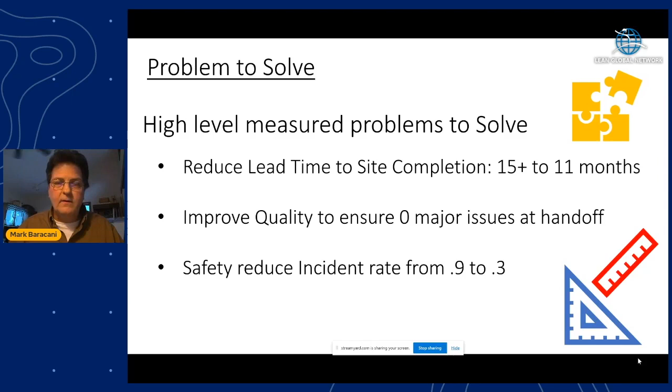And Microsoft is extremely into providing a safe construction site, more than any other company I've ever worked for in my 30-some year career. So the safety goal was to reduce the current incident rate that was at about 0.9 to 0.3 and be able to sustain it around 0.3 or 0.2. Now, if some of you are in the construction field, I think the global averages are more between 2 and 3 on a recordable incident rate. So Microsoft really wants to be much better than that. We want to be 10% of that. So they have extremely high safety goals at Microsoft, which is a great thing to keep the construction workers and their employees safe.

So it's definitely more of a challenge to get to the value creating work than it was at Genie, where you're working directly for that company. So that was one of my biggest concerns when we started this venture, and it has some challenges, but it has not been as much as I thought it would be.

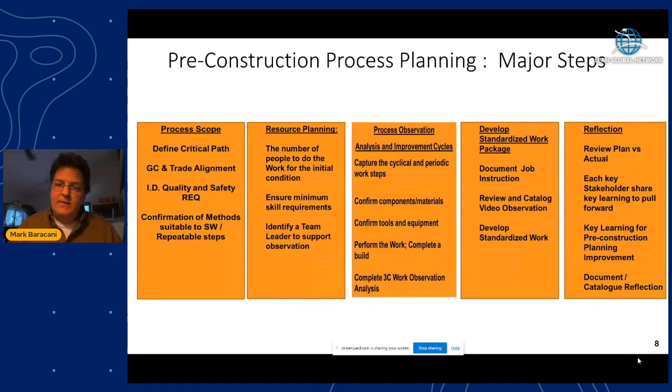The last box on the right, the reflection, this is the capability development portion of it. Make sure we share the learnings with the trade partners, the supervisors, the management team, so they all get the benefit of these lean improvements in the Kaizen method. And that was really the process that we developed with the HAC.

Studying the current work starts with the 3C training, right? And I'm sure most of you are familiar with this. So some of the initial observations that we made, the initial pre-planning stages, we worked with the manufacturer. We said, hey, you guys designed this thing. You must have an intent on how it goes together. So that was the starting process. We got basically like an IKEA instruction set from them. That was a great standard work starting process on their intent.

So that's one of the key learnings that we have, is that when you really start focusing and making their work cyclical, assigning tasks, that's really where a lot of the benefits come into play. So we gave them some brief training on this, showed them how to identify waste, and then attack the Gemba, the actual work on the construction site. And we deeply understood the current state. We dove into it, right?

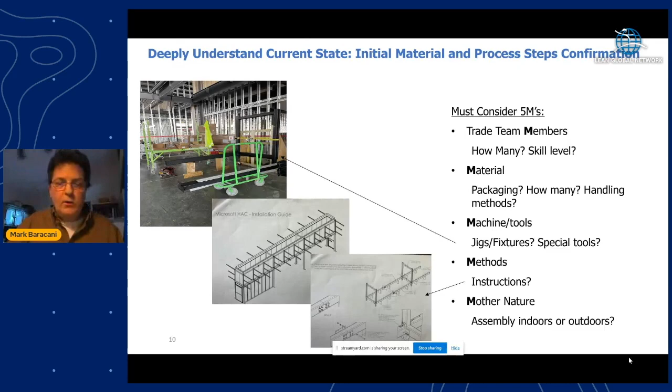I'm just going to do a time check here to make sure I'm not talking too long. I think I'm on track.

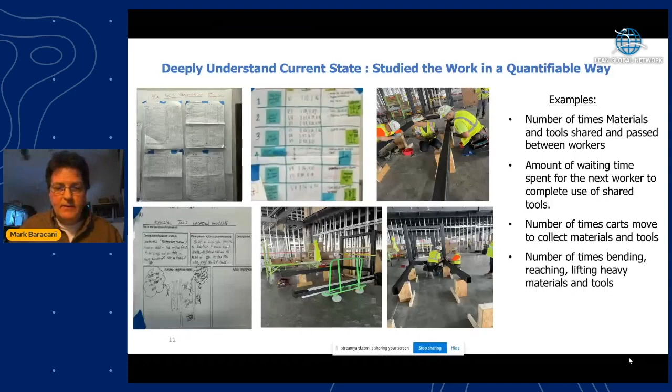Hello. Yes. Hello, Victoria. How are you? I'm doing great. And you? Fine, thank you. Okay. Can you guys still hear me? Are we good to keep going? No, I can hear you there. Are you gonna be sharing your screen? Are you guys okay? I'm going to keep going. I don't know.

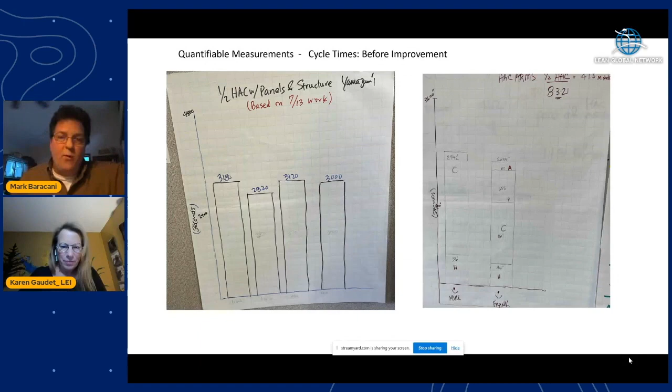So what you see on the screen right now is the Yamazumi. It was basically the measured cycle times before the improvement. So this is the times it took, 3,000 seconds to assemble a half HAC, basically.

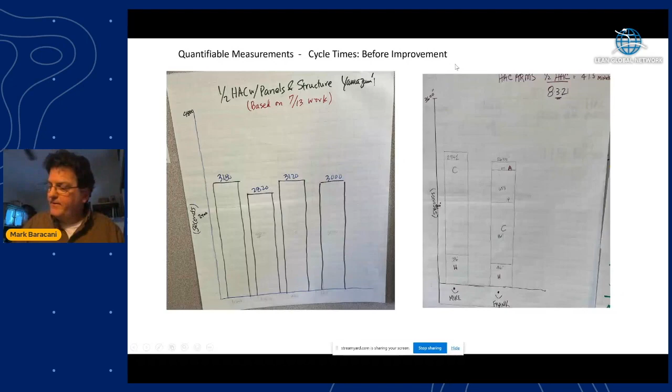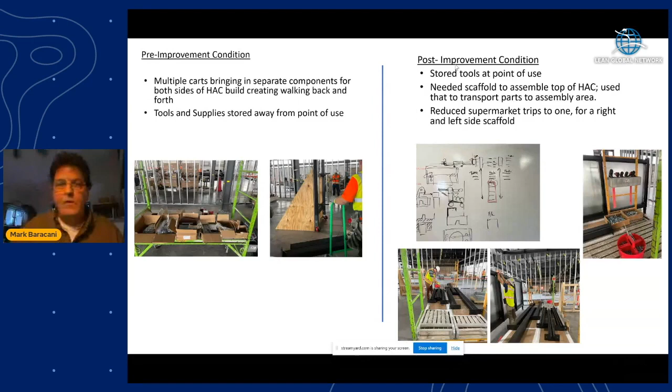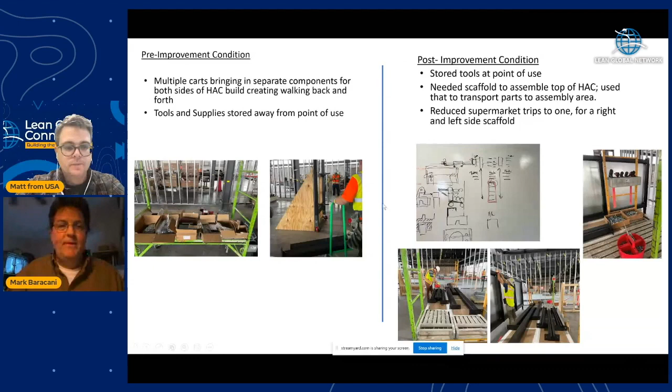Yes, I can see it. We can hear somebody on there. I don't know if anybody. That's your presentation, right? Yeah. Okay. You guys okay? So I got a couple examples of the pre-improvement condition and then the after. No, it's normal. Okay, I'm going to keep going on here, guys. I'm sorry, we got some background noises here. Yeah, I'm sorry about this. Yeah, we are getting some background noise. Please continue. I just wasn't sure if you guys can still hear me. We can still hear you, Mark. Okay, I'll continue on. I'll just talk real loud now.

Okay, so I got some examples of the before and after, basically, of the improvements. So to give you an idea of some of the things we did, they had multiple carts bringing in the components. They had tools and supplies that were stored away from the point of use, so they're constantly walking for parts, constantly walking for tools. Still sharing. And then on the right side, you can see the improved condition.

We moved the tools to the point of use. And that's what you see up here on the far right picture. We needed scaffolding to assemble the top portion of the HAC, so we decided to use that scaffolding to transport the parts to the assembly area.

So we got rid of those drywall carts, and we reduced the supermarket trips to one trip, basically, for the right and left side of the scaffold. So we greatly reduced the number of trips. The scaffold would come out of the assembly area. They'd fill it with parts, and then they'd remove those parts from the one side of the scaffold and build up the lower section of the HAC.

And that freed up the space so that they could stand there. And then they would reach and grab the other parts to build up the upper part of the HAC.

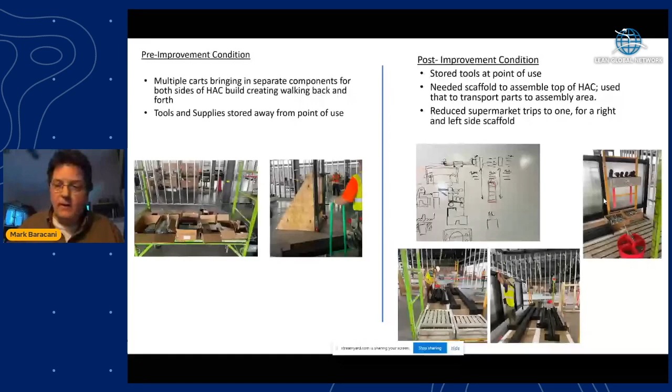And this is another example. Arms get installed on the HAC, and certain electrical receptacles and stuff get mounted to these arms, and basket tray and fiber. They were delivered to the HAC one at a time. They leaned them up against the HAC, and then they ran a string line across the top, and they used two people, as you can see there in the middle, to basically mount these arms.

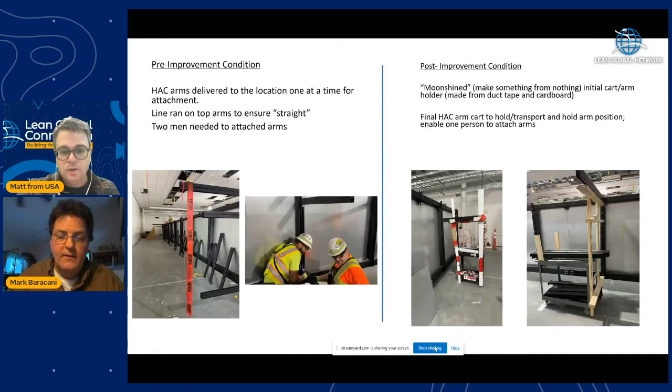Mark, I'm sorry to interrupt your presentation. I think we've identified the source of that audio. You may have another tab open in your browser that is causing the problem. If you close the other tab, we should not hear them anymore. Okay, we no longer hear additional voices, so let's get back to your presentation. I apologize for that. Sorry about that, I didn't realize that. Okay, great, Mark. You have your slides ready? Here you are. Thank you. Okay. All right.

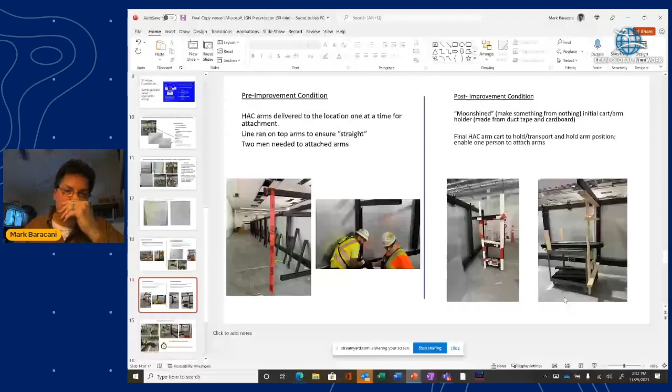So if you look at the after, the team, the LEI, led this kind of moonshining effort. And if you're not familiar with the moonshining term, it's making something from nothing. It's based on the old moonshiners down in the south of the U.S. who made moonshine from just old radiators and stuff they found in junkyards.

So the LEI team and Microsoft team made up an initial cart here, basically out of duct tape and cardboard, to give the operators some ideas on a different approach to transport the arms and insert the arms. So the cardboard one was transformed. The mechanical team is made up of carpenters, so they made about 4 of these out of wood. They were able to load the carts up, go down the line, install the 3 levels of arms that are on this HAC on each side, and it became a one-person job at that point.

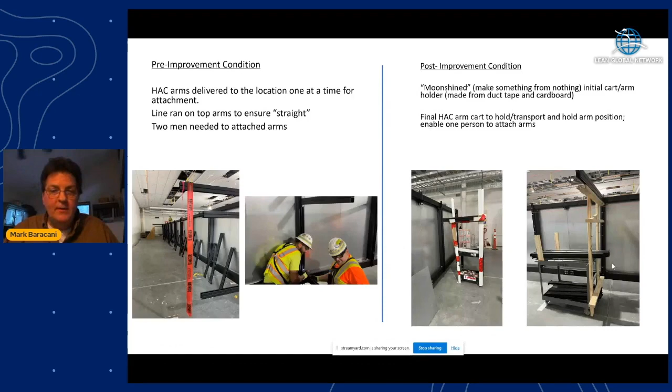So as a result of the work improvements here, we reduced a lot of hard work, a lot of safety risks. We reduced a lot of waste, and we saved 28 minutes of time on the half of a HAC section, which is a little over 50% of the initial time that we observed. And we've got to take that into account. Also, we hit the ground running. Remember, we did that 3P process. We planned. We had a lot of tools ordered. We had things there. So we cut the cycle time down by more than half.

I think it would have been a much greater improvement had they hit the ground with no support in that pre-construction process planning. And each building roughly takes 100 of these HACs. So you can get an idea of the actual time savings. If you can save 28 minutes on half a section, you've got to build 100 of them, and you've got a team of 4 people working on it. It's a good savings for everybody.

Everybody benefits from it. This mechanical team comes off the critical path. They get their work done on schedule. The general contractor's happy. They're happy. Microsoft's happy. We get our data center on time. So it's definitely a win-win situation.